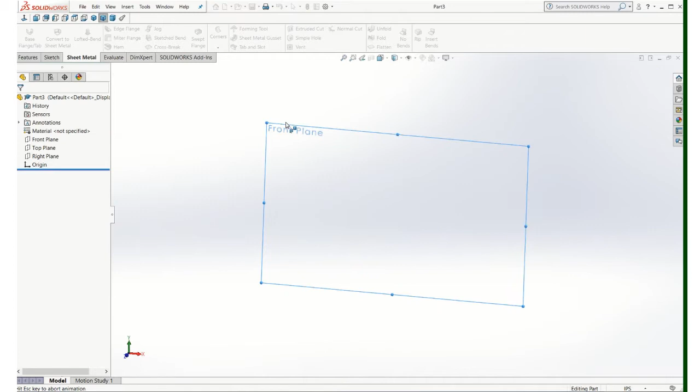Make sure sheet metal is active. You just have to bring your cursor up along this row here, right click and put a check mark next to sheet metal, and that'll be available. So we're not going to start out with a sketch. We're going to start out, if you click the sheet metal tab, click base flange tab and click on one of your planes, and then we'll use our regular sketch tool just like we always have.

I'll use the center rectangle tool in this case, and I need an 8 by 6 rectangle. That's going to be the base of my part.

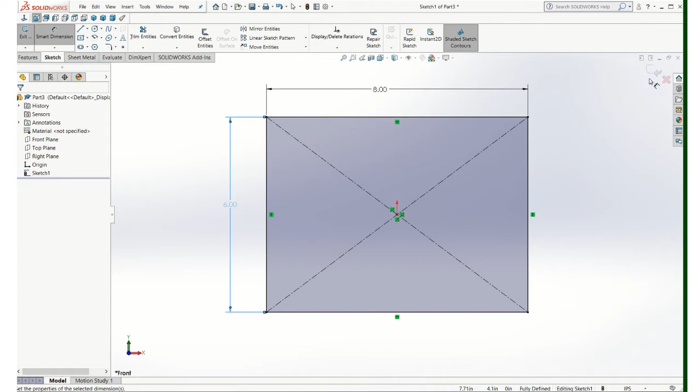I'll finish the sketch, and this menu is going to pop up here. I just need to put in the thickness of my metal. In this case it's 0.095. K factor has to do with how you bend the metal, or how the metal can be bent. We can leave that alone. The rest of these we can just stay the same.

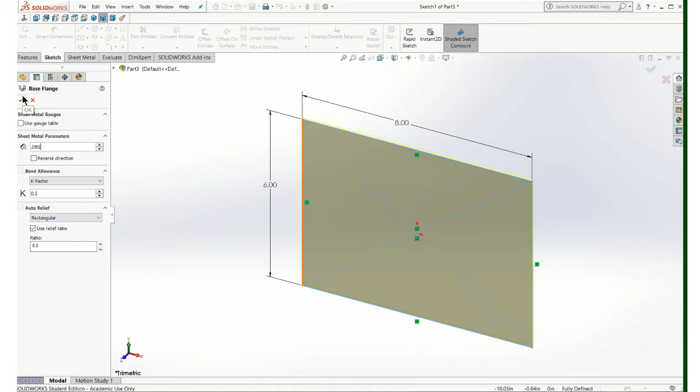And there's our base for the part. We're going to add some sides to this, which are going to end up being the legs. The way you do that is still under the sheet metal tab, use the edge flange. What you want to do is click on the edge where you want to add a part, and you can see if you move your cursor, it's going to show you what's going to happen here.

I'm going to click that, and then I can come over and put a dimension on that. In this case, we need a 2.5 dimension for that leg. Now this is going to describe the way that that dimension is interpreted. Do you want it to go from the outer edge, so that would be from the very bottom up to here, which is what I want, because that way you have really good control over the outside dimensions of the part.

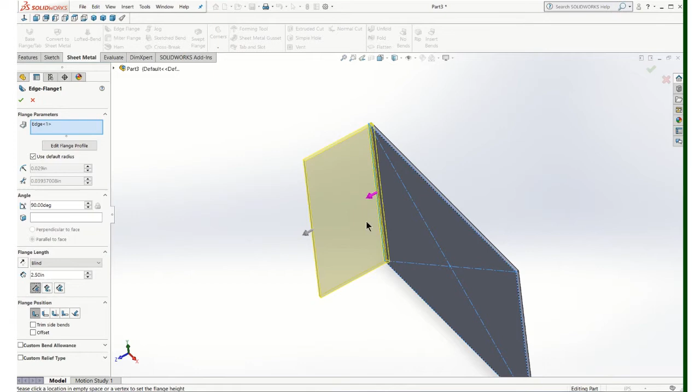If you work it that way, you can do just the length of the flange itself, or you can do this one with the tangent, which is kind of difficult to interpret for me. And then there's also the flange position. So if you look here, you'll see the way that corner looks.

So if I'm on this position here where the material's on the inside, you see it puts the bend on the inside. So this part is 8 inches wide. The 8-inch dimension is going to be to the outside. If you click on there, see how it moves the bend on the outside of the material, and this one goes even farther out. So if you're trying to make space for something to fit inside there, you might use that, but typically you just leave it on that default right there.

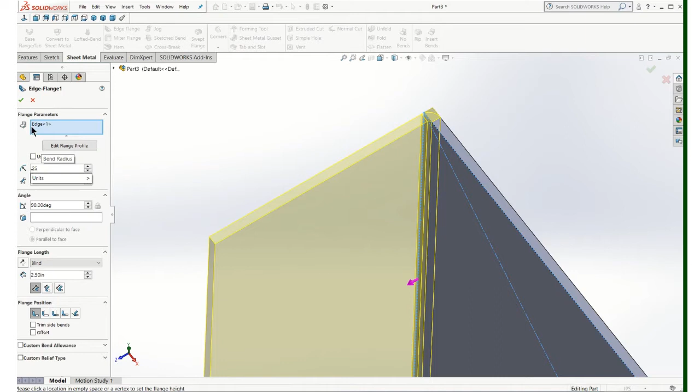This is going to be your bend radius, and in this case what we're going to use is, that's a really tight radius. We are going to use a 0.25 bend radius here. And then we'll say OK, and let's see what that looks like.

Now that's a pretty big bend. So if we decide we want to change that, just like we have always done with our sketches, we can change those numbers. Let's make that 1/8 of an inch and see how that looks. Let's go with that 1/8 inch bend.

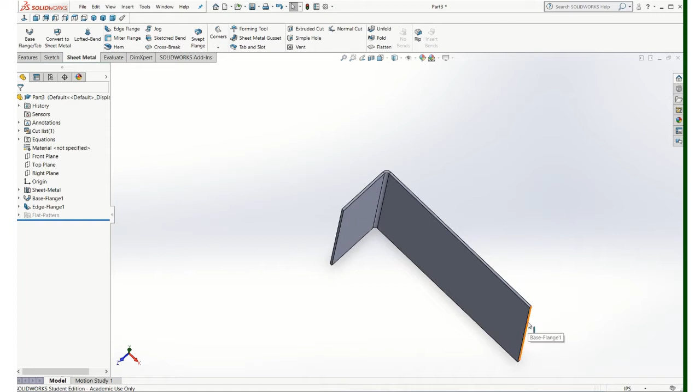Now I want to do the same on the other side. I want to put the same flange on there. So I can actually just continue on just by making sure that this blue box is active. Click on that, and I'll do the exact same thing. Click on an edge and just pull it up. Now if I want everything to stay the same, that's all I have to do. So then I can say OK, and I have the 2 flanges.

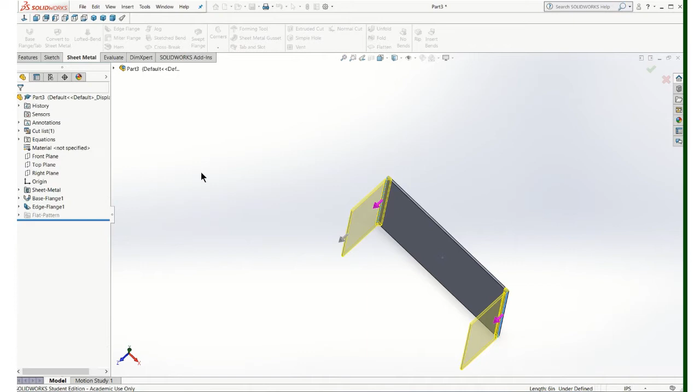Now I'm also going to put some feet on this, so let's do that again. Let's go to edge flange. I'm going to click on here, and I'm going to pull it on the inside, click it, and in this case, that's going to be 3/4 of an inch. That's how long that is. So from the outside to here is 3/4.

Again, I'm going to leave it on this position, leave it on that dimension right there. Make sure that blue box is active, and I can get the other side, pull it the same way, dimensions stay the same, everything stays the same. So I've got the feet on there.

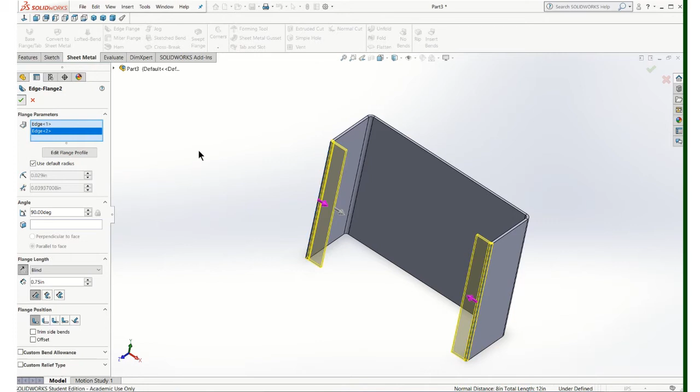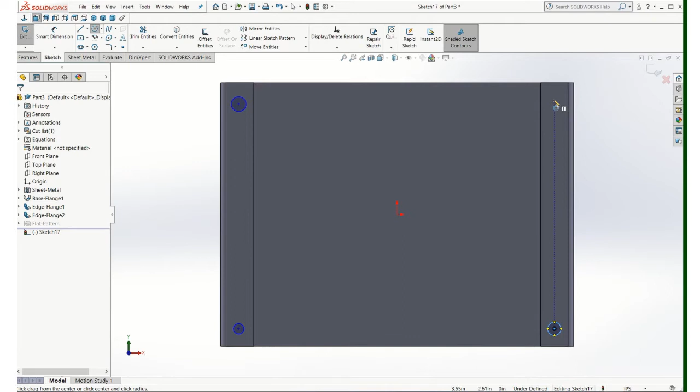I do want to put some holes in the bottom of that as well. So in order to do that, just use your normal sketch tools. I'll just sketch on there and put those small holes, like some kind of mounting holes, I suppose. And we'll dimension those.

So that's the same kind of technique we've been using in terms of sketching and extruding, that we've been using with our standard construction methods. And this hole is 0.5, this way as well.

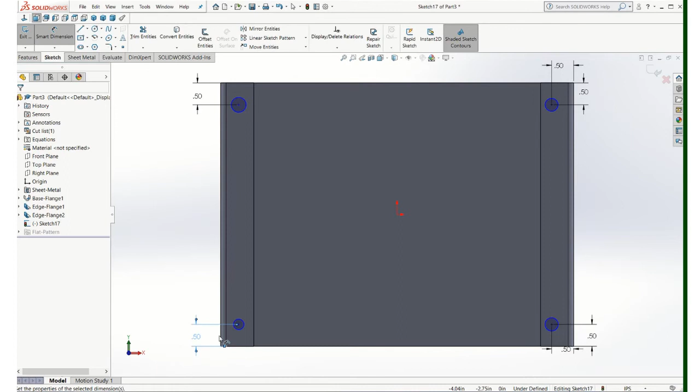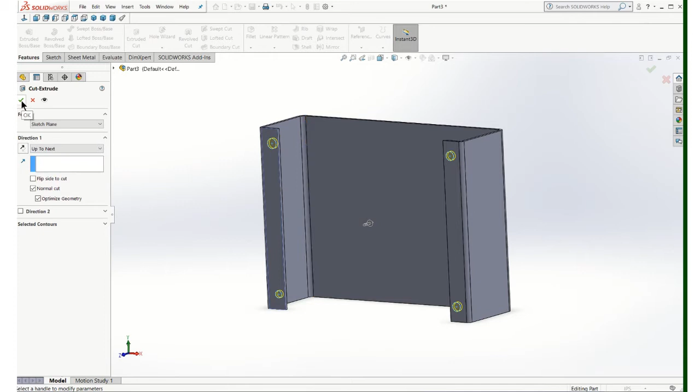And one more. Finish the sketch, do an extrude cut. Don't go all the way through. I'm going to do up to next. You can do it with a dimension as well. Okay, so that takes care of that.

The other thing I want to do is put fillets on all these corners. Now you'll notice if you go to the sheet metal tab, you have a corner tool, which is really handy. You can do different things with the corners. What we want to do is break the corners, and you can use this to either put chamfers or fillets.

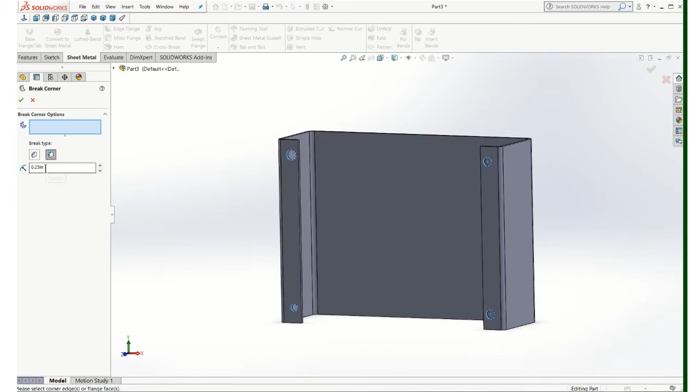In this case, we're going to put a fillet, and we're going to put a 1/4 inch radius. You can just click on the face, and you see what it does is put the fillets. You can click on that face and it'll put the fillets on there, and it just gets rid of any sharp edges that we have.

Okay, we have to add another feature onto the top of this, so I can just use the sheet metal base flange, or... let's see, I don't know what I got going on there.

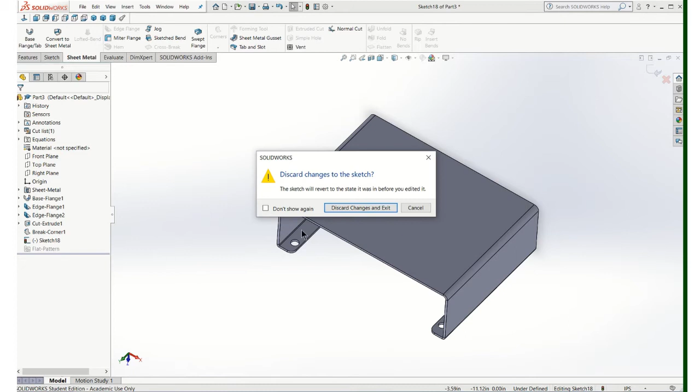Okay, sheet metal tab, base flange tab, and just click on that face there, and we can use it just like the sketch tool.

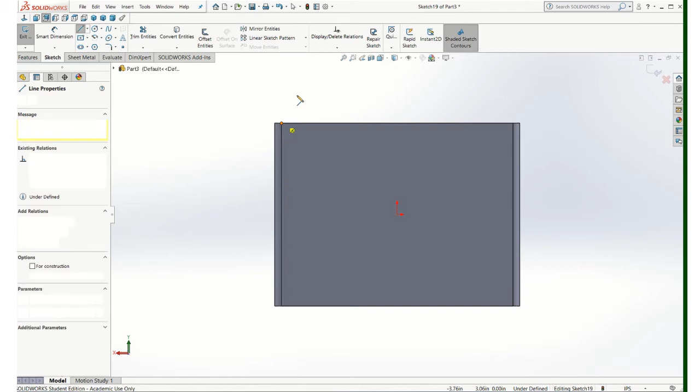I know that this starts, the corner of this is right there at that point, so I'm just going to use that as a constraint. And we'll need to draw that closed shape there. I'll need to put some dimensions on that.

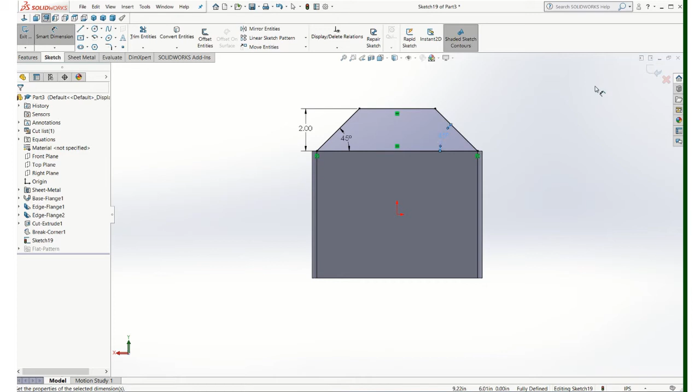And actually, that's all I need. I've got enough constraints on there. Now, when you finish, you'll see...

The software's pretty smart, it already knows the material I've been using. If I wanted to change it, I'd have to do something different because I'm going to merge the result. It's basically just adding material, so that's easy enough. It's the same thing as doing a sketch extrude, quite honestly.

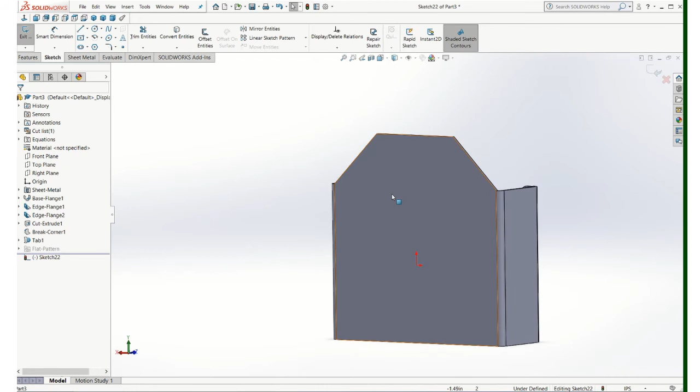We do have a cutout that we want to do on this, and I'm just going to use my sketch tool to do the cutout. So you see there's some overlap here when you're making sheet metal parts.

First I'm just going to sketch it out kind of quickly, and then I'm going to use my constraints here, and I'll just make sure that all of those edges are parallel. Yeah, I think that one's good. Yeah, we're fine there.

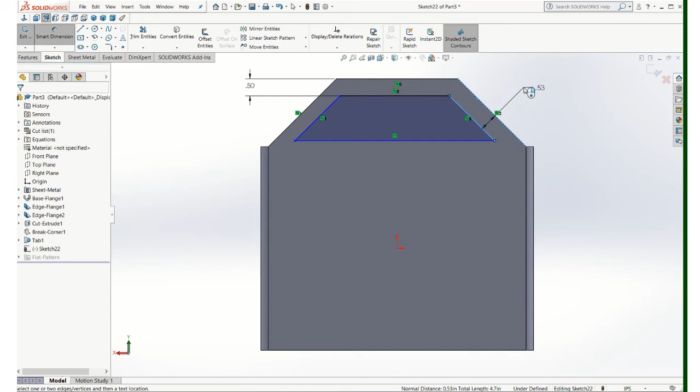Okay, and then I'll add the dimensions that I need. Everything's 0.5 on this, so it's all really symmetrical. Just make sure you get it fully constrained. And then this dimension here is 1.25.

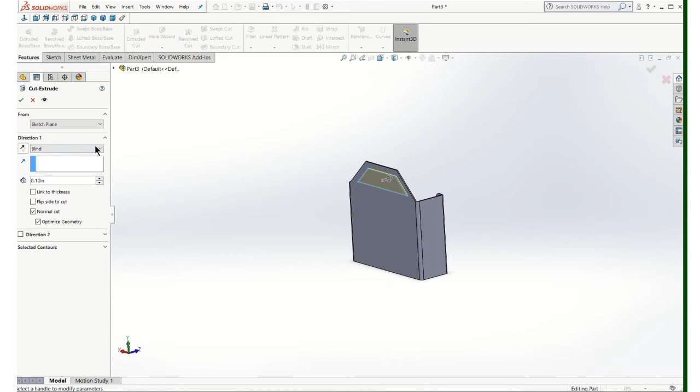Finish the sketch, I'll do an extrude cut. And lastly, I've got some holes to put in the side of this, and again, I'm just going to use my sketch tool.

And those are 1.375. And let's use some relations here, kind of make this a little bit easier. Let's just click on all three of these. It'll make them equal so we know they're the same size.

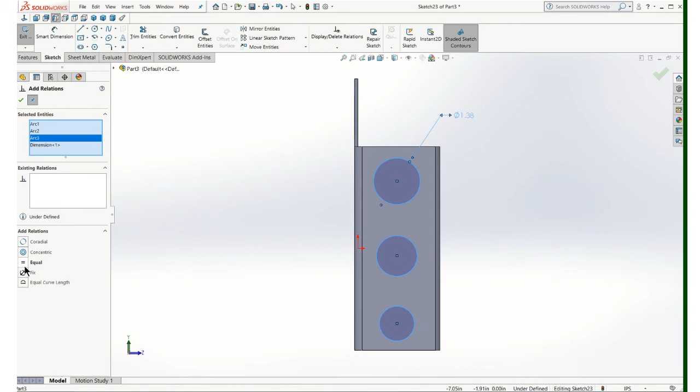And then let's click on these center lines and make them all vertical, so now it'll reduce the number of dimensions. It's not that big of a deal. And that's 1.25. I still will need to add height dimensions to these.

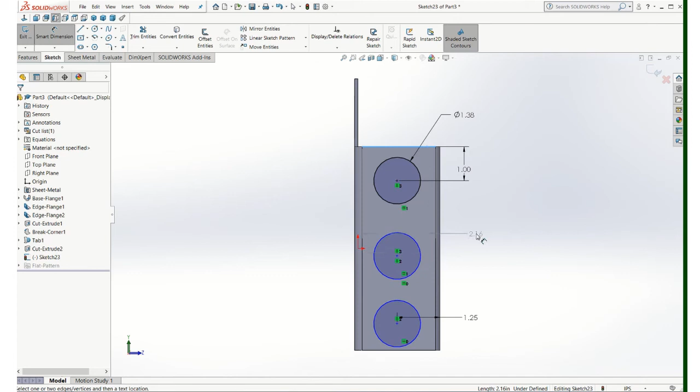Let's try that again. Finish the sketch, and I'll have the holes go through both sides, so I'm just going to make it easy on myself by extrude cutting all the way through.

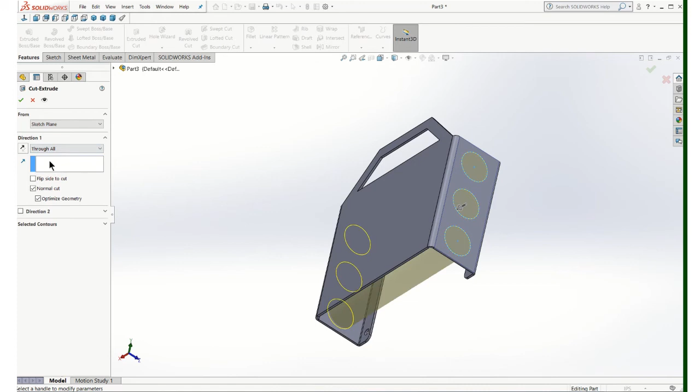And there's my finished part. Let me save that.

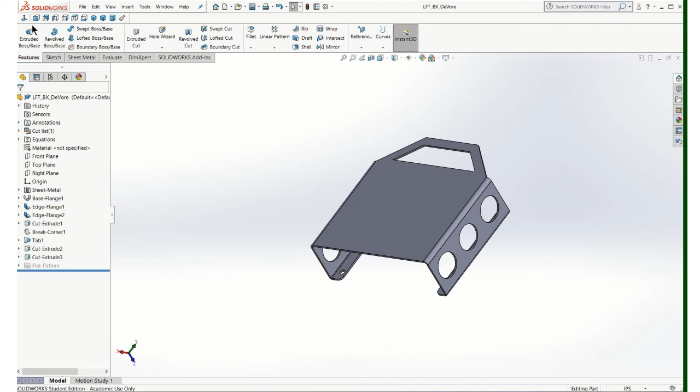And let's look at what the pattern's going to look like. So if you click on the sheet metal tab, you can go to flatten, and it'll show you what your flat pattern looks like, which is super helpful. You could take that and make a DXF file, send it to your CNC laser, plasma, water jet, etc.

to cut it out. Or we can put it on a drawing sheet and use it as a flat pattern if you wanted to make it that way. It'll show you the bend lines and all the other features there.

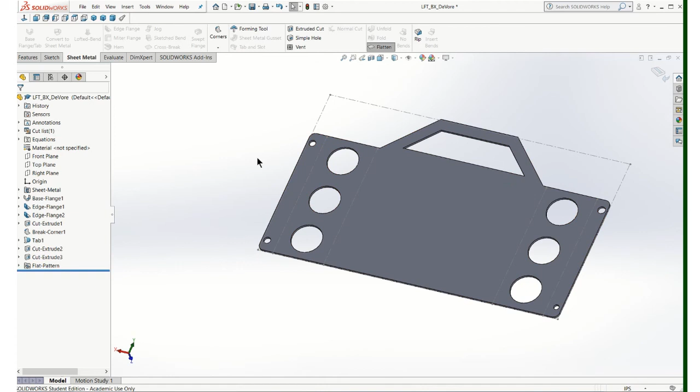Let's put that on a drawing sheet. Now again, depending on the use, if you're going to manually make this, then you would just go ahead and make detailed drawings like we're used to doing.

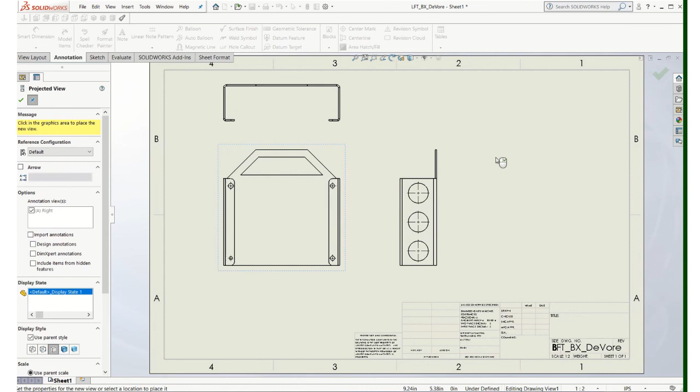Let's see what that view looks like - oh yeah, that's perfect. I think that's a really good view, because if you're looking underneath, sort of underneath here, you're going to not have all the hidden lines. If you flip this over, you've got too many hidden lines.

So that would be our drawing. Yeah, that's okay, that's an okay drawing, okay view. So then we just need to add the dimensions to that for our detailed drawing. The other thing I'm going to want you to do, let's save that.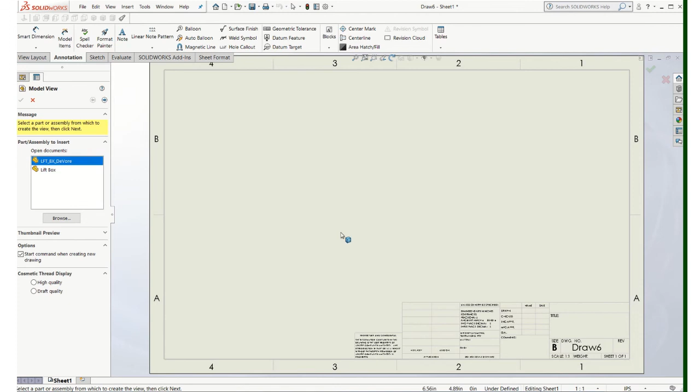So let's put the flat pattern on a separate sheet. So let's do a new drawing. This time, let's go over here.

And one of your options on the view is going to be your flat pattern. So it's right there, and again you're going to see where all the features are. You're going to see the bend lines. It even gives you a description - that's the bend radius, and it also tells you the angle that you want to bend it, and you can dimension that if you want.

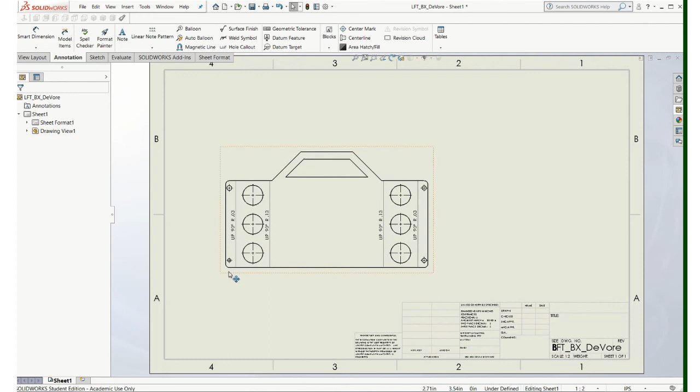So let's put that, let's put the flat pattern. Also, it's kind of nice to put the ISO - put an ISO view on the sheet as well.

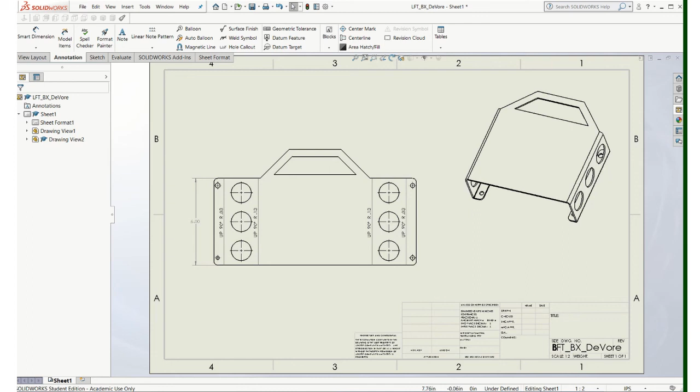That looks pretty good. So then we can add dimensions to this as needed, and that's what I'll have you do. So two sheets: one that's got the regular detail view, three views with an ISO with dimensions on it, and then a view that's got the flat pattern. Put some dimensions on the flat pattern.